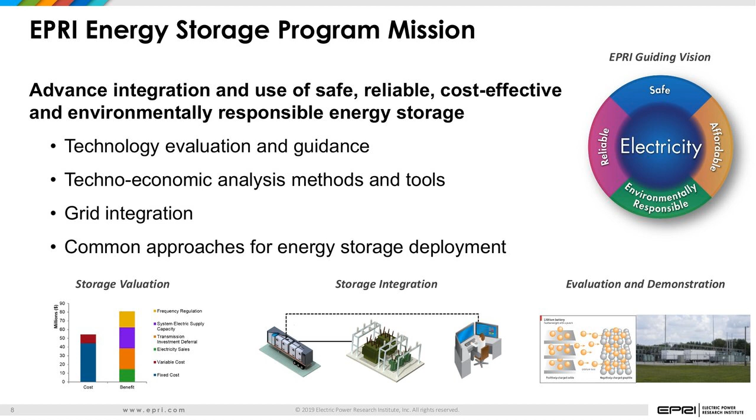We do that through 4 major thrusts. One is that we evaluate technologies, and we try to provide guidance toward the market and technical needs for different technologies. We build tools and methods for analyzing the value and grid impacts of energy storage technologies. We focus on the grid integration of demonstration systems and trying to develop best practices for energy storage deployment.

So this particular webinar, we're going to be focused on energy storage technologies. I'm going to start with an introduction to energy storage kind of from the big picture. Then I'm going to hand it over to my colleague, Erin Minear, who's going to talk about attributes. What is the difference between different energy storage technologies and why do these attributes matter? Then Brittany Westlake will be walking you through the different energy storage technologies and some of their key attributes. And I'll provide a short wrap-up and share some of the available resources that we can offer that are publicly available.

So what is energy storage? Very simply, and this will be no news to many of you who are on this call, but energy storage is essentially a device that takes electricity in, stores it, and releases energy out back to the power grid. And in the middle of there will be some losses in various forms, typically in the form of heat.

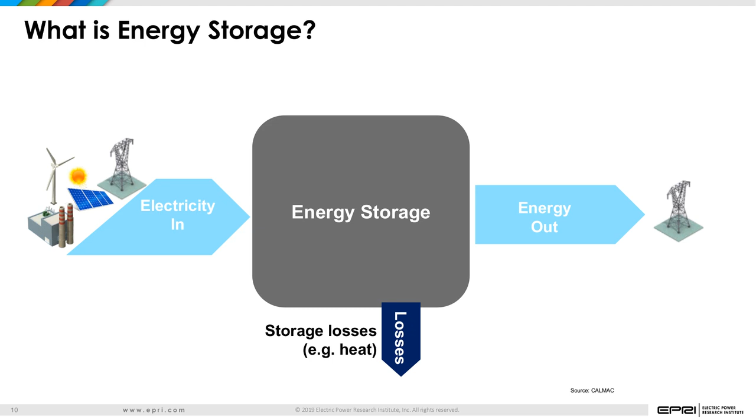When we look at energy storage in a bit more expanded way, and what we'll cover a little bit on this call, is that there's not just the simple electricity in and electricity out. There's also other technologies that behave like energy storage, and some may take actually some input fuel as well as storing electricity, and some may also have heat out that can be used to offset electricity use, or in some cases electricity may come in and produce a fuel like hydrogen or natural gas when it comes out.

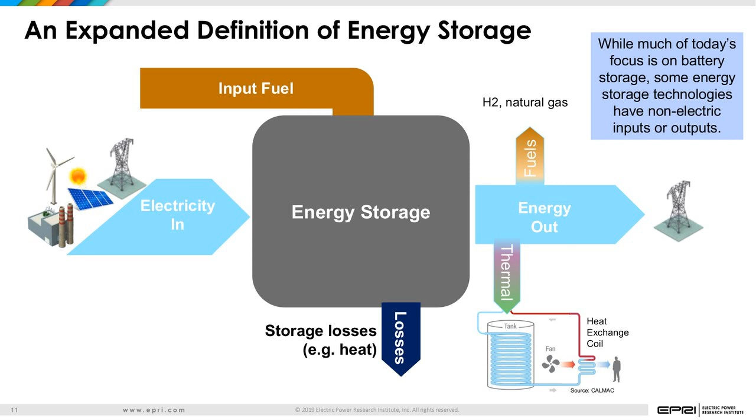So just want to expand the scope a little bit. Most of what we're hearing about is the simple electricity in and electricity out, but there are other kinds of hybrid resources that we'll touch on that are not that simple.

And before we jump into all the technologies and all the attributes, I just want to provide a little bit on the very big picture for energy storage technology deployment. It's important to realize that energy storage, while new as a hot topic of discussion over the last 5 years, has actually existed for a long time on the grid in the form of pumped hydropower, which is another technology that we'll be touching on in this webinar. Globally, about 95% of all installed storage is pumped hydropower. That's about 183 gigawatts globally, according to last access of the DOE Energy Storage Database. About 3 gigawatts of electrochemical storage and about 3 gigawatts of thermal storage as well.

However, battery storage is really growing fast right now, and it's often what people are talking about when they're talking about storage. Due to electrification of automotives and proliferation of portable electronics, lithium ion batteries have been invested in to a great degree, both in R&D and manufacturing. And as a result, the costs are dropping rapidly. And as a result of that, about 98% of all new advanced storage or non-pumped hydro storage projects are now lithium ion, and all others make up about the remaining 2%.

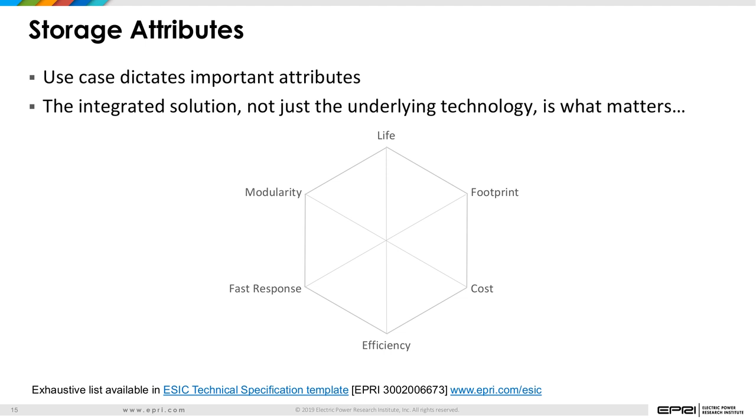We have an exhaustive list of technical specifications that's publicly available. It's called the ESIC Technical Specification Template, and there's a link to the website where you can download that. And I'll go into a few of these in more detail.

If you were to do deep cycles, which means that you're taking the battery from a full state of charge or a full battery and you're using all the energy within the reservoir, that would be considered a deep cycle, and then charging it back up. Cycling those deep discharges and charges would degrade the battery faster than what we call shallow cycles, which would be charging and discharging a little bit, but not using the full range of the battery.

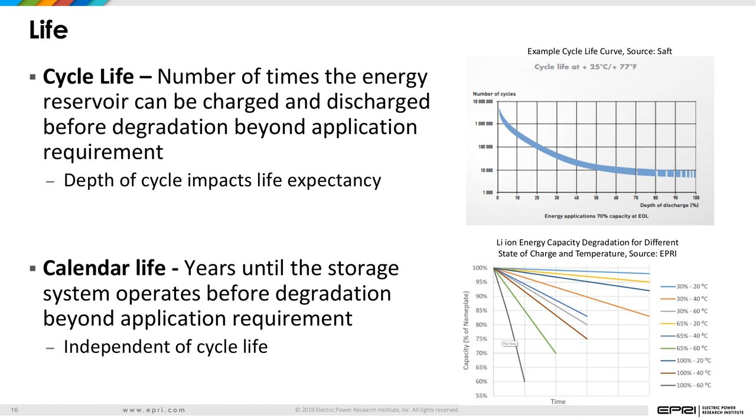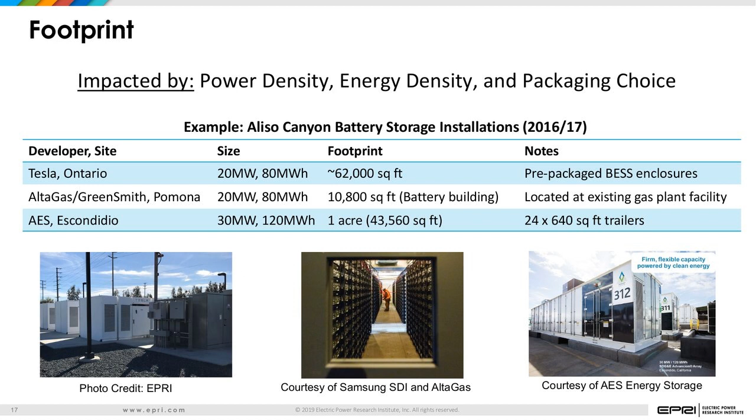Efficiency is another metric. So efficiency is the ratio of delivered discharge energy to delivered charge energy, including parasitic loads. And when talking about efficiency, we want to highlight the importance of understanding exactly what's included in the measurement and how it's measured. When folks talk about efficiency, it could be of the storage medium itself, or it could be the efficiency up to the point of interconnection. It may or may not include auxiliary losses, such as HVAC, electronics, pumps, or other mechanical equipment. And so it's good to get on the same page when we're comparing side by side of what the definition of efficiency is and what's included and excluded.

The last thing I'll mention on here is the self-discharge rate. For some technologies, even if the storage is not being used, it could lose some of its energy over time while it's resting, so it could discharge over time. And depending on how your efficiency is calculated, if it's over a full day or a month, then that self-discharge could factor into the efficiency equation.

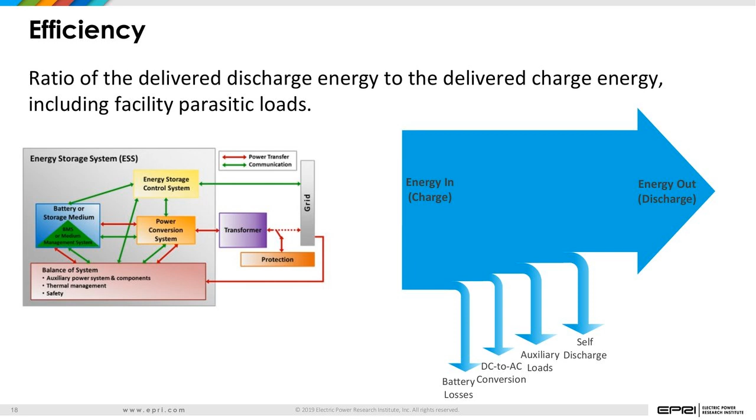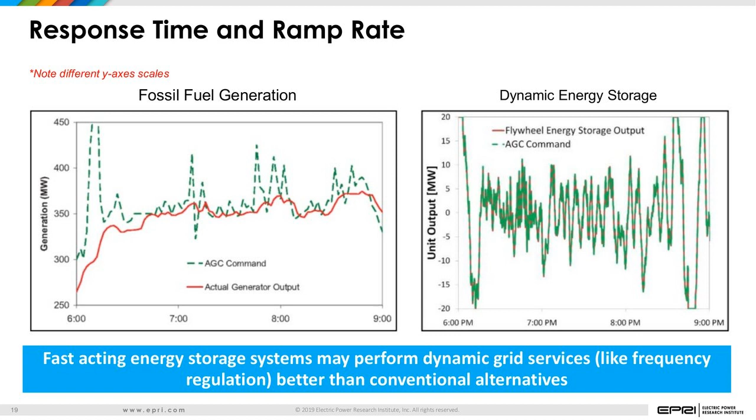Response time and ramp rate. Here I just want to highlight that there are differences in the response time between mechanically coupled and inverter-based storage. And again, for some applications with the need for dynamic grid services like frequency regulation, inverter-based storage could be a good alternative if you need that fast response.

And lastly, I'll talk about safety. I didn't include it in that initial web of attributes. One of the reasons is because even though there's inherent risks with each of the technologies, it's the integration and the protection that's key to ensuring safe operations. So there's different types of hazards, chemical, fire, stranded energy, electrical, physical, but these can be addressed with the integration and protection.

Also, to help address some of these types of hazards, there's emerging codes and standards, but the technology, especially advanced storage technologies, is moving a lot faster than standard development. So it's a really critical piece to evaluate and understand the different safety aspects and how the system is being integrated while the codes and standards catch up to the current technology advancements.

Those are the key attributes, and I don't see any questions in the feed right now, so I'll hand it over to my colleague, Dr. Brittany Westlake, to talk about the different storage technologies.

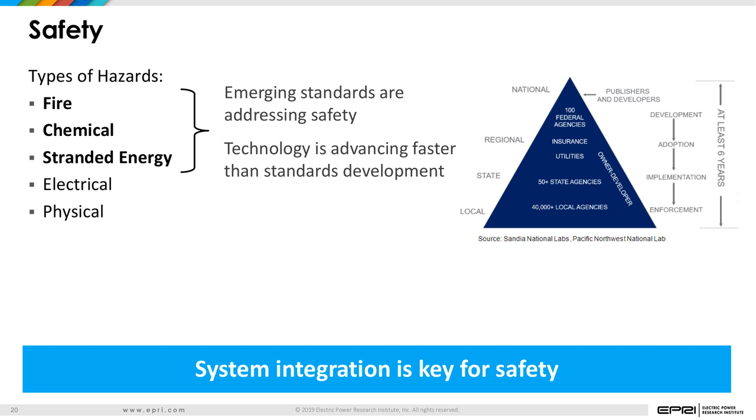Thank you, Erin. And I hope everyone in the audience kind of feels like they have the beginning of an understanding of how some of these storage technologies work. The good news or the bad news is next, I'm a physical chemist. So I'm going to talk to you about some of the mechanics or the chemistry behind how some of these work. And hopefully I haven't lost you already. If anyone hated chemistry, it'll hopefully give you an understanding of how this energy is stored.

Essentially, energy storage is just storing potential energy on the grid. We talk about how there hasn't traditionally been a lot of storage on the grid, but as a chemist, I would argue we've had that stored energy in the form of coal bonds, in the form of natural gas bonds, even in your car, your gas tank with gasoline. All of that energy is stored in those chemical bonds. And so I look at energy storage sometimes as a way that we can store that potential energy at a time when it's convenient and then recover it later.

And there's lots of categories. So thinking through, what are the different ways of storing that energy? There's, of course, electrochemical batteries, a number of different types of those, electromechanical storage, and we'll talk closely on compressed air energy storage, the pumped hydro that Erin mentioned, flywheels.

And I'm not covering it in this talk, but there's a lot of research and focus on emerging storage in the electromechanical. There's a technology that takes blocks or train cars with rocks, moves them uphill, and stores them, essentially with the gravitational potential energy that can be recovered later. There's other companies that look at electric motors that can store and stack blocks the same way a crane building a building would do, but then adding the regenerative aspect of dropping those blocks later when you want to recover that energy.

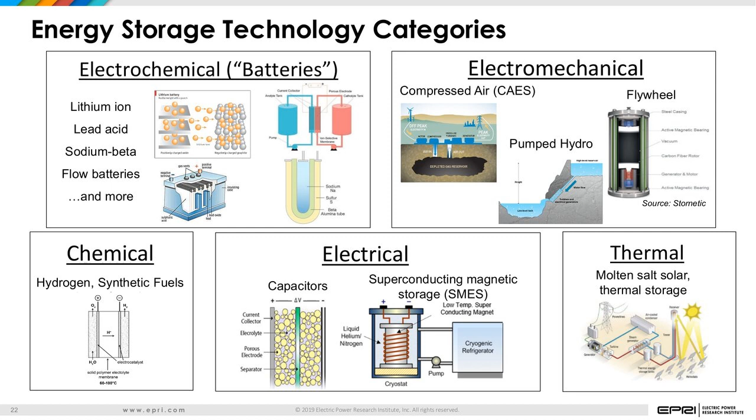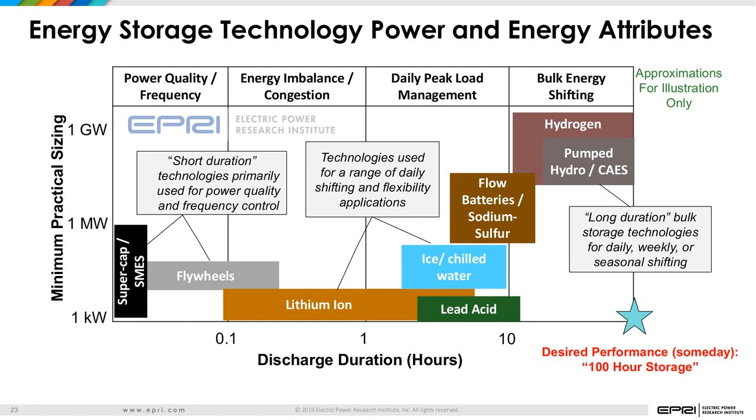So now jumping into the technologies, the first one I'm going to talk about is pumped hydroelectric storage, and I think, in addition to being the longest used one on the grid, it's a good example of that potential energy. It helps me to envision: you're pumping the water uphill, you've got that gravitational energy stored in that water up in the reservoir, and the system is designed to let it flow downhill back through the pumps where it generates electricity, similar to a regular hydropower plant.

In talking about footprint, obviously you're looking at bigger spaces for the water reservoirs than you might for a battery system, but you're also getting the benefit of scale. Once you build the infrastructure to pump the water and then recover the electricity, additional energy, or in Erin's analogy, making the keg bigger, is just expanding the reservoir on the top and the bottom of the system. The typical efficiency of pumped hydroelectric storage is in the 75 to 85% range.

And thinking about life, maintenance on the pumps. We talk about self-discharge in battery systems. In this case, one of the self-discharge issues you'd have to think about is the water in your reservoirs evaporating. So in all the basic parameters that we're trying to give you for the different storage technologies, think about how these technologies are very different and they might look different as you apply them to different applications.

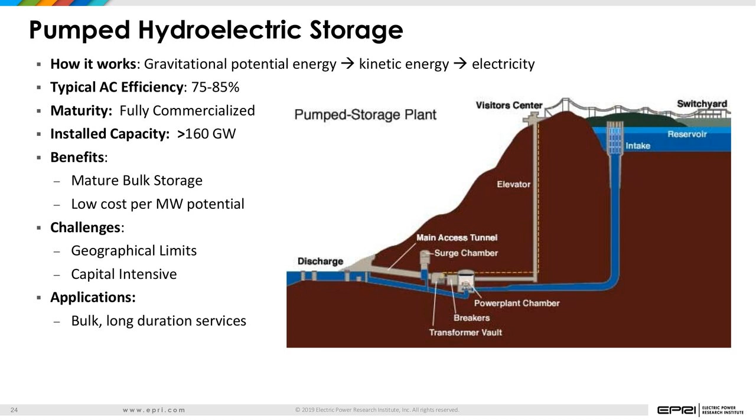The next technology I'll cover is lithium-ion batteries. And I'm sure, since you're on this webcast, you haven't missed any of the news on the large deployment of lithium-ion batteries. They work in a similar way of storing potential energy within the battery, but in this case, it's lithium ions that get shuttled from the anode to the cathode across the battery, and then are able to be recovered when you discharge.

These technologies have advanced dramatically in the last 10 or 20 years, and they've also benefited from manufacturing scale with electric vehicles. So we're seeing a range of chemistries and different flavors of lithium-ion batteries that are starting to be very cost competitive in stationary markets, whether they're residential or larger transmission-connected systems, to provide flexibility on the grid.

Cycle life for lithium-ion batteries is usually 3,750 to 10,000 cycles. So it depends on how much they're used, as Erin covered on the life of the systems; doing full discharges is going to shorten your life versus shorter discharges. And also thinking about system design, the thickness of the cathodes and the anodes can be changed to increase power versus energy, but you also have to think about the balance of plant systems, the inverters and other aspects of the lithium storage system, and how that affects the power capabilities of the system.

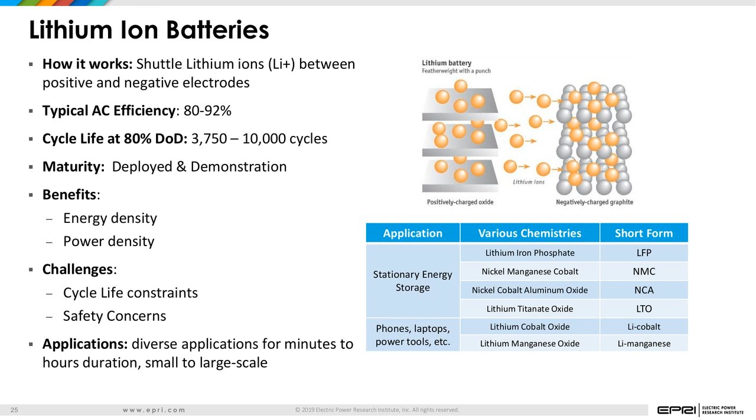Another historically deployed energy storage is compressed air energy storage. And one of my colleagues here at EPRI was integral in installing the Alabama plant. Compressed air energy storage pumps air into underground cavities, creating the pressurized potential energy of the air in those cavities. Then the air is allowed to flow back up, and they recover that energy by combining it in a gas turbine and increasing the efficiency.

So that is another technology that has been deployed in two instances. Like pumped storage hydro, it can be geologically limited, but there is a lot of research going into decoupling compressed air energy storage in adiabatic or other cases so that it's not as tied to geologic limitations.

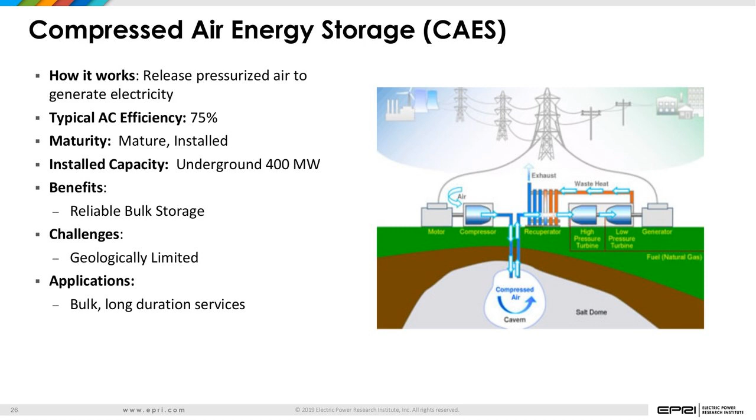Another technology that's sort of interesting to think about from an energy storage perspective is flywheels. Currently on the grid, a lot of our generation is based on coal, nuclear, natural gas, and all of those are steam or thermal generation. The power is generated by rotating machinery to create the 3 phases of electricity that we have on our grid.

And as we think about new and alternative technologies, or even locational areas where we don't have that frequency response on the grid, flywheels can play an important role to store some of that rotational inertia and help balance the power on that side.

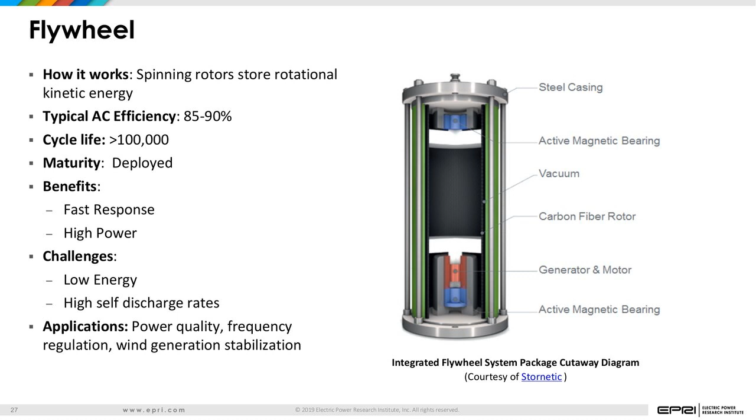Not going to get into the physics of volt and var, but I will recommend MIT's Future of the Grid. At the very end, there's really good appendices that go into the physics of balancing the 3 phases of the electricity that I think, at least looking through the pictures, is accessible even if you're not a physicist or a chemist. And there's several companies developing different flywheel technologies.

Another traditionally established battery technology is the lead-acid battery. They are widely used for telecommunications backups and building backups. I challenge the group now. I play a game when I walk around airports and other facilities that have backup power needs, and I often come across a room that will say battery room. And a lot of those are backed up by lead-acid batteries.

They have some challenges in their lifetime, and often they have maintenance. If they're filled batteries, they need to be monitored and then refilled with water. But one area that the lead-acid battery industry has really excelled in, especially here in the United States, is their recycling. They are 98% recycled here in the United States.

So while they are an older technology with some environmental challenges, I think the industry as a whole has really made the effort to step up and think about how do they collect, reuse, and recycle these materials so that they can continue in a sustainable process.

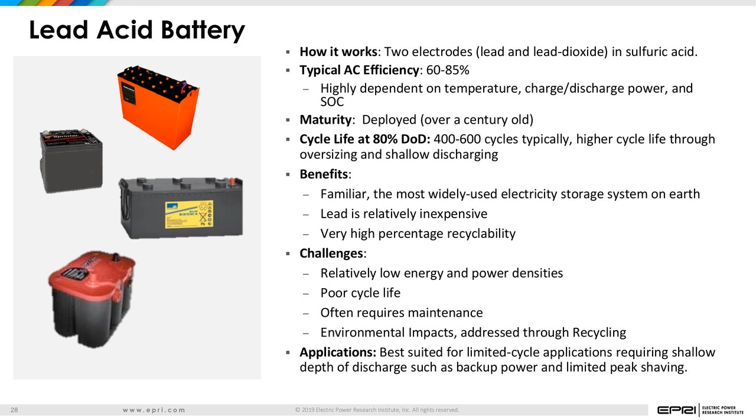And then another large battery technology, which also has the option for modularity, is flow batteries. We're seeing many different chemistries being developed. In a traditional battery with lithium or lead acid, you have a cathode and an anode separated physically with an electrolyte that allows the ions to pass back and forth as the electrons are either charging or discharging from the battery.

In a flow battery, you have two liquids that are able to flow through the system, and they're stored in tanks, so you're separating that potential energy of the system when you separate the electrolytes in two different tanks. Then you can charge the battery by flowing them through a stack, and you can discharge the battery by flowing those two separated electrolytes back through the stack cell to produce the electricity.

Now we're seeing a number of chemistries and technologies developed in this case. One strength that flow batteries have over traditional lithium-ion and lead-acid batteries is the ability to decouple the energy and the power. To increase the power of a flow battery, you simply increase the stack size, and to increase the energy of the system, you can increase your electrolyte tanks.

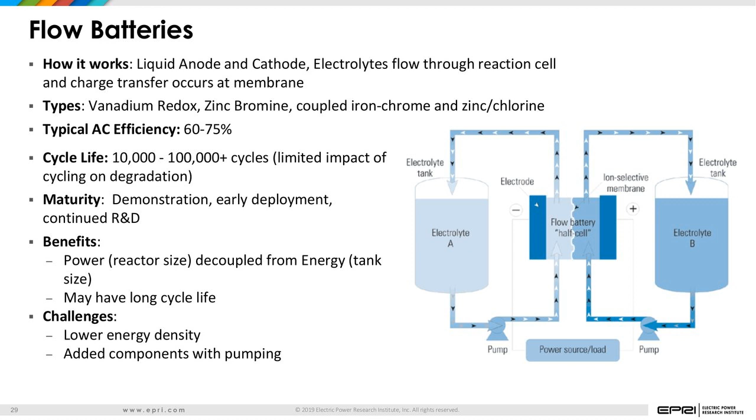However, we're also seeing some modularity in flow battery systems, where for manufacturing and ease of installation, they're coupling the power and the energy to create a modular system that they can install and just add multiples of those. So it'll be interesting to watch as this technology continues to develop.

Another technology that we're seeing is thermal energy storage, and that is manifesting in multiple ways on the grid. Some is in ice storage, where you're using air conditioning to do the phase change between liquid water and solid ice, which is an excellent way to store energy and then recover it later. It's not strictly electricity in and electricity out storage, but it is a novel way to shift the electricity use on the grid.

We're seeing others where you would collect solar energy, store it in a thermal reservoir, and recover that thermal heat afterwards, like you see if you've done the cross-country flight. Sometimes from my airplane window I can see the solar collectors with the tower.

We're also seeing thermal energy storage where electrical energy is used to create heat, and that heat can be stored in a number of mediums, sand, concrete blocks, thermal bricks, in addition to molten salts, and then that heat can be recovered later to optimize thermal processes on generation plants or even back to electricity. So that is another technology area that we're watching.

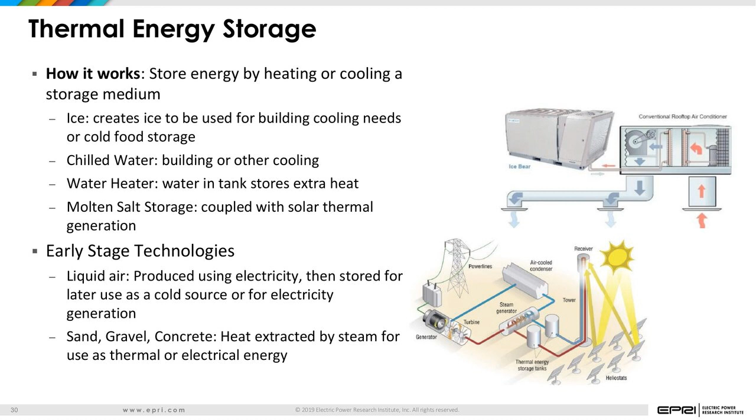And so it looks like we got some questions in. I apologize, in the interest of time I went quickly on that, but now I will review some of those questions, unless Ben would advise me to wait to the end.

I think we can, I only have a couple wrap-up slides. Why don't I go ahead and finish up the presentation? And then I see that there's a number of good questions in there, so why don't we come back to those in a few minutes. Okay. All right.

So I just wanted to end with this note that when you choose the technologies and design projects, it's not just the attributes that have been talked about here. There's really no single answer to technology selection or project design, how big the system should be. Value, cost and the risks associated with the project all really need to be considered in parallel in the design phase, and that includes really understanding your application, what you're trying to solve primarily, what is the motivation for putting storage in,

and then if there are other opportunities to create value above and beyond that. There is a lot of talk right now about multiple use applications or stacked benefits. And even if you start with just a single service in mind, there's the potential that over the course of the life of that storage plant it could be extended to address new services and create new value streams as the conditions on the grid change or other factors.